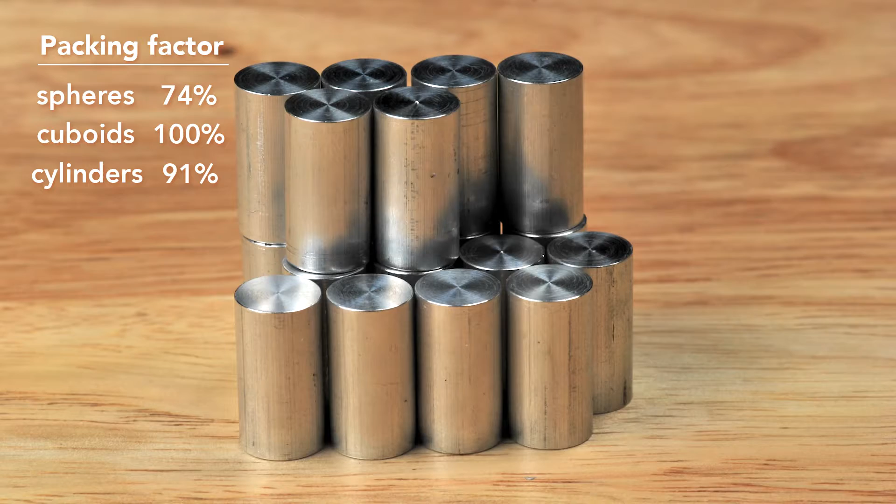From the top, it's like a sphere, and from the side, it's like a cuboid. A cylinder has a maximum packing factor of about 91%, not as good as the cuboid, but better than the sphere. Most important of all, the cylinder can be rapidly manufactured.

The can begins as this disc called a blank, punched from an aluminum sheet about 3/10 of a millimeter thick. The first step starts with a drawing die, on which sits the blank and then a blank holder that rests on top. We'll look at a slice of the die so we can see what's happening.

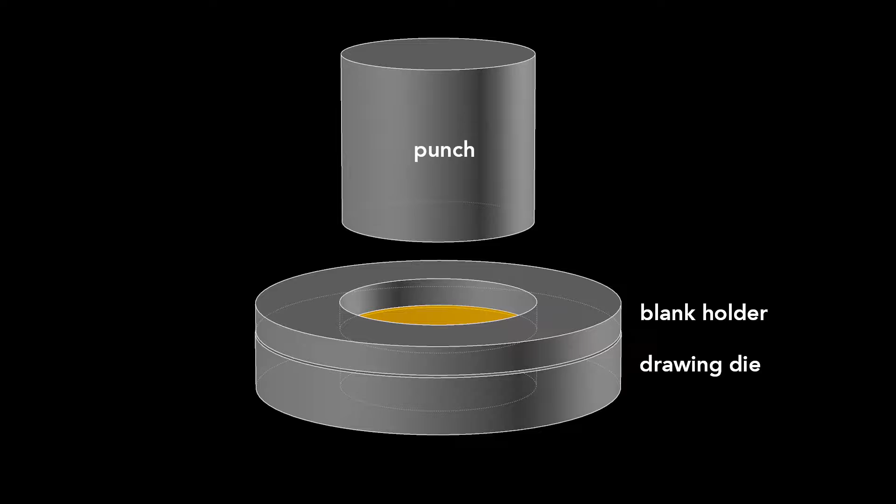A cylindrical punch presses down on the die, forming the blank into a cup. This process is called drawing. This cup is about 88 millimeters in diameter, larger than the final can, so it's redrawn.

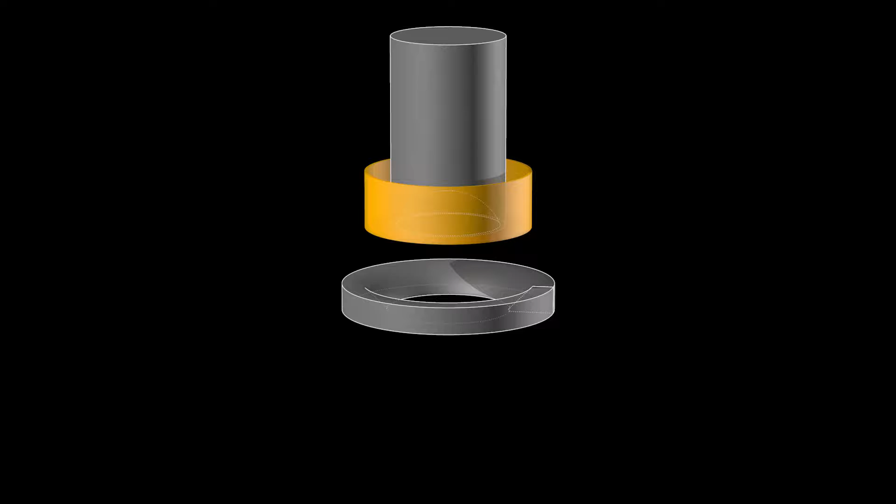That process starts with this wide cup and uses another cylindrical punch and a redrawing die. The punch presses the cup through the redrawing die and transforms it into a cup with a narrower diameter, which is a bit taller.

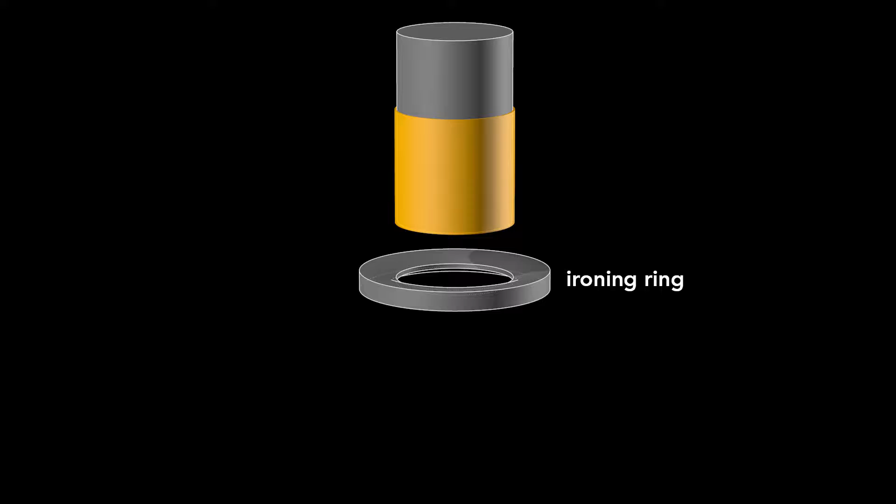This redrawn cup is now the final diameter of the can, 65 millimeters, but it's not yet tall enough. A punch pushes this redrawn cup through an ironing ring. The cup stays the same diameter as it becomes taller and the walls thinner.

If we watch this process again up close, you see the initial thick wall and then the thinner wall after it's ironed. Ironing occurs in 3 stages, each progressively making the walls thinner and the can taller.

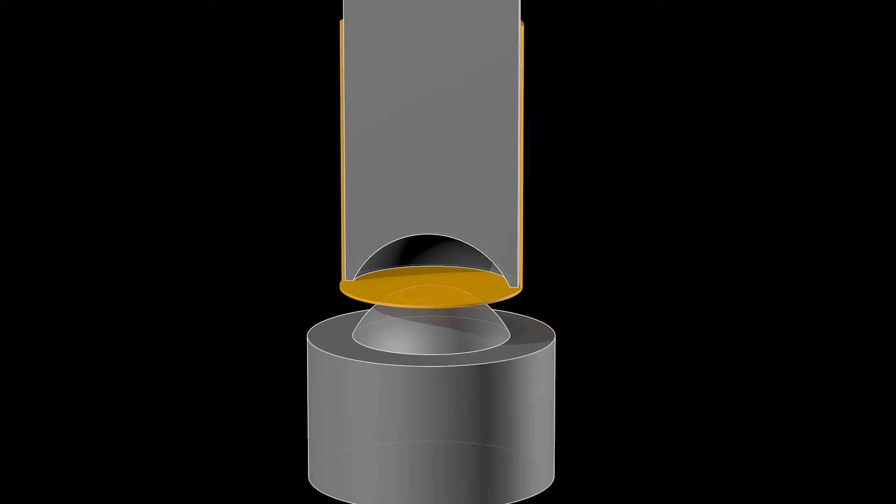After the cup is ironed, the dome on the bottom is formed. This requires a convex doming tool and a punch with a matching concave indentation. As the punch presses the cup downward into the doming tool, the cup bottom then deforms into a dome.

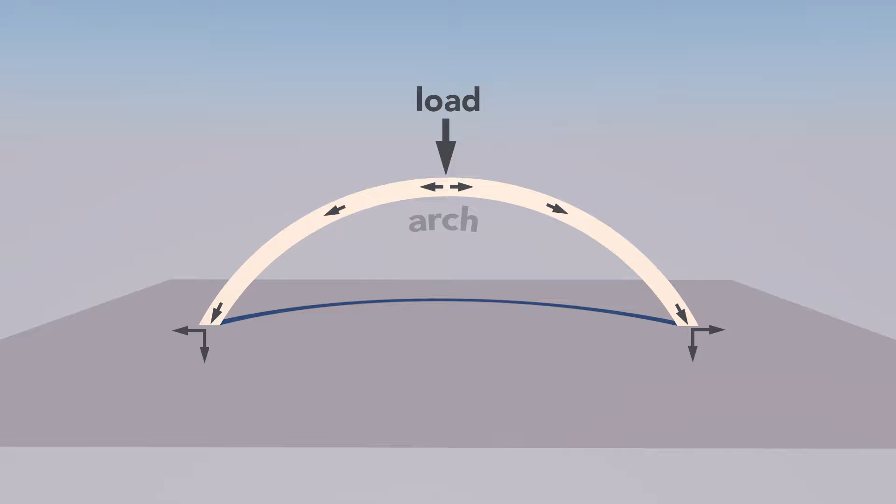That dome reduces the amount of metal needed to manufacture the can. The dome bottom uses less material than if the bottom were flat. A dome is an arch revolved around its center. The curvature of the arch distributes some of the vertical load into horizontal forces, allowing a dome to withstand greater pressure than a flat beam.

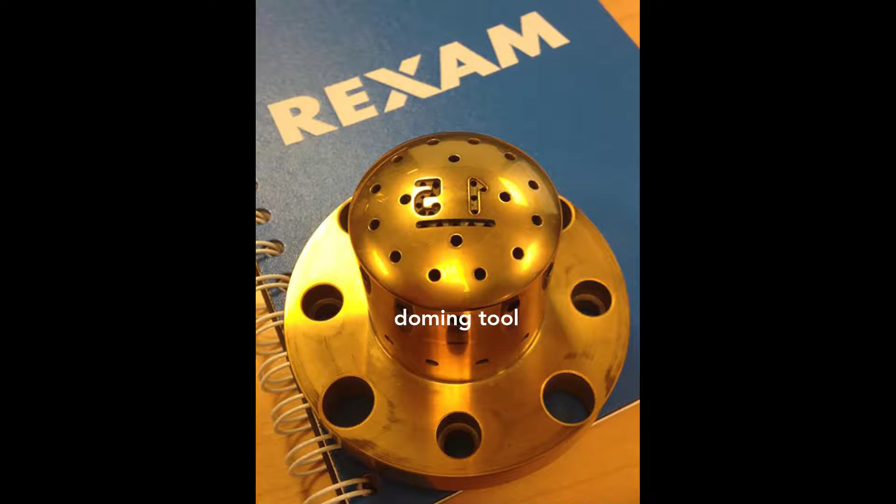On the dome, you might notice 2 large numbers. These debossed numbers are engraved on the doming tool. The first number signifies the production line in the factory, and the second number signifies the body maker number. The body maker is the machine that performs the redrawing, ironing, and doming processes. These numbers help troubleshoot production problems in the factory.

In that factory, the manufacturing of a can takes place at a tremendous rate.

These last 3 steps, redrawing, ironing, and doming, all happen in one continuous stroke in only 1/7 of a second. The punch moves at a maximum velocity of 11 meters per second and experiences a maximum acceleration of 45 Gs. This process runs continuously for 6 months, or around 100 million cycles, before the machine needs servicing.

Now, if you look closely at the top of the can body, you see that the edges are wavy and uneven. These irregularities occur during the forming. To get a nice, even edge, about 6 millimeters is trimmed off of the top. With an even top, the can can now be sealed.

But before that sealing occurs, a colorful design is printed on the outside. The term of art in the industry is decoration. The inside also gets a treatment. A spray-coated epoxy lacquer separates the can's contents from its aluminum walls. This prevents the drink from acquiring a metallic taste and also keeps acids in the beverage from dissolving the aluminum.

The next step forms the can's neck, the part of the can body that tapers inward. This necking requires 11 stages. The forming starts with a straight-walled can.

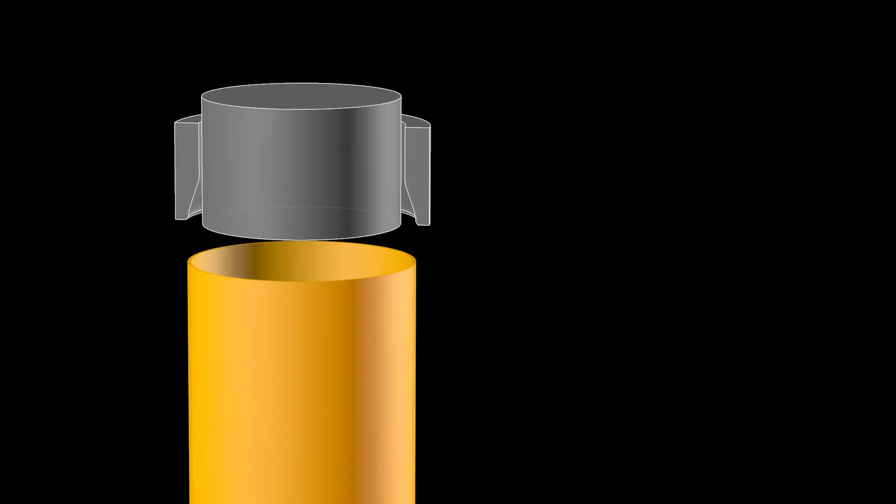The top is brought slightly inward, and then this is repeated further up the can wall until the final diameter is reached. The change in neck size at each stage is so subtle that you can barely tell a difference between one stage and the next. Each one of these stages works by inserting an inner die into the can body, then pushing an outer die, called the necking sleeve, around the outside.

The necking sleeve retracts, the inner die retracts, and the can moves to the next stage. The necking is drawn out over many different stages to prevent wrinkling or pleating of the thin aluminum.

Since the 1960s, the diameter of the can end has become smaller by 6 millimeters, from 60 millimeters to 54 millimeters today. This seems a tiny amount, but the aluminum can industry produces over 100 billion cans a year, so that 6 millimeter reduction saves at least 90 million kilograms of aluminum annually.

That amount would form a solid cube of aluminum 32 meters on a side. Compare that to a 787 Dreamliner with a 60-meter wingspan.

Now, after the neck has been formed, the top is flanged. That is, it flares out slightly and allows the end to be secured to the body, which brings us to the next brilliant design feature, the double seam.

On older steel cans, manufacturers welded or soldered on the ends. This often contaminated the can's contents. In contrast, today's cans use a hygienic double seam, which can also be made faster. This can is cut in half so you can see the cross-section of the double seam.

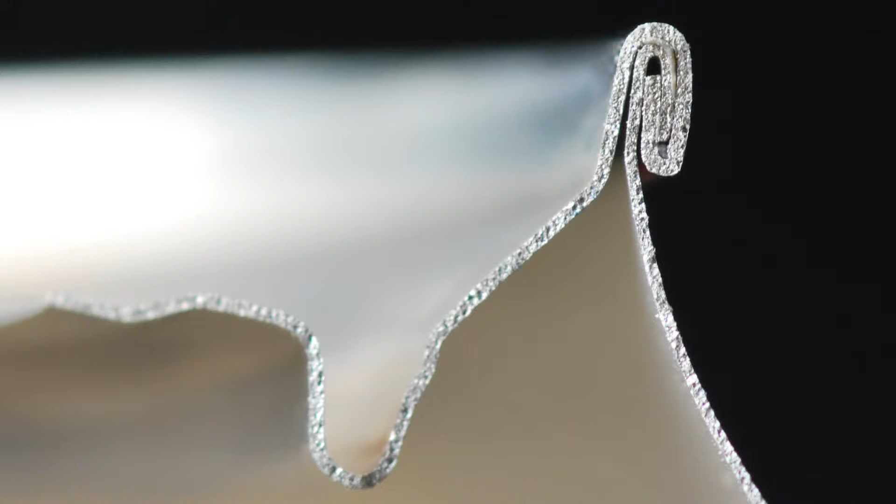To create this seam, a machine uses two basic operations. The first curls the end of the can cover around the flange of the can body. The second operation presses the folds of the metal together to form an airtight seal.

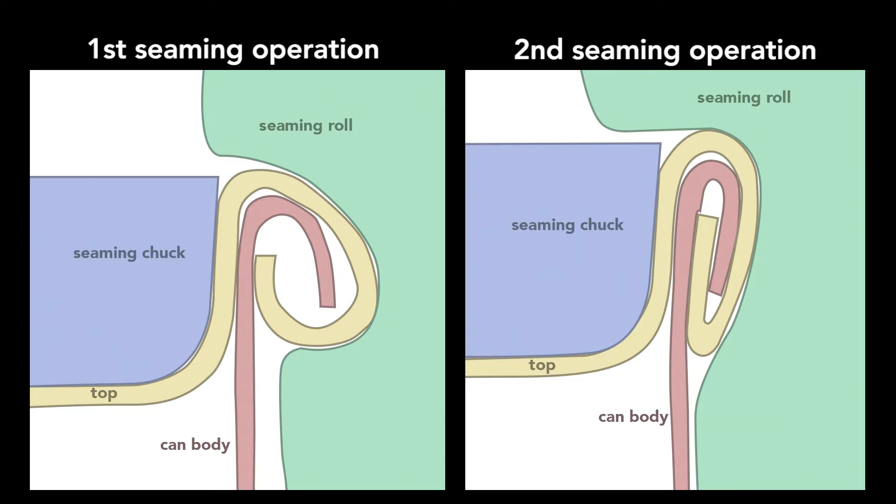While the operations themselves are simple, they require high precision. Parts misaligned by a small fraction of a millimeter cause the seam to fail. In addition to the clamping of the end and can body, a sealing compound ensures that no gas escapes through the double seam. The compound is applied as a liquid, then hardens to form a gasket.

The end, attached immediately after the can is filled, traps gases inside the can to create pressures of about 30 psi, or 2 times atmospheric pressure. In soda, carbon dioxide produces the pressure. In non-carbonated drinks like juices, nitrogen is added.

So why is a beverage can pressurized? Because the internal pressure creates a strong can despite its thin walls. Squeeze a closed, pressurized can, it barely gives. Then, squeeze an empty can. It flexes easily, the can walls are thin, only 75 microns thick, and they're flimsy. But the internal pressure of a sealed can pushes outwards equally and so keeps the wall in tension.

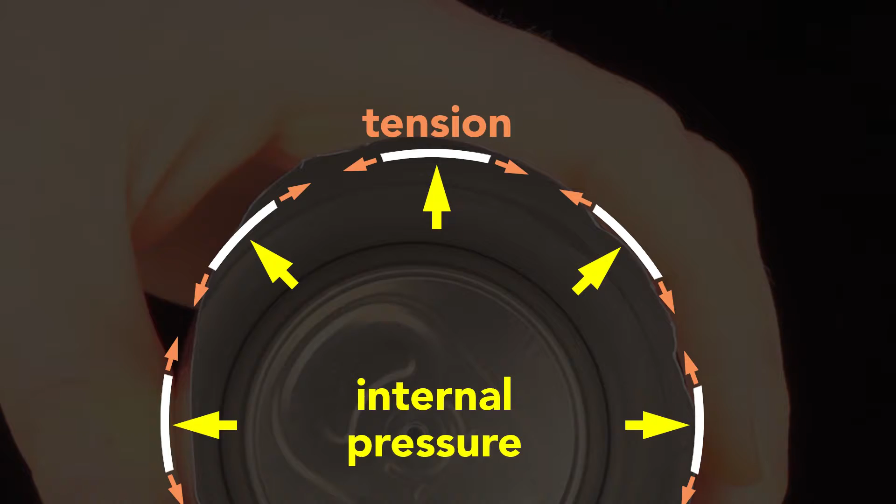This tension is key. The thin wall acts like a chain. In compression, it has no strength, but in tension, it's very strong. The internal pressure strengthens the cans so that they can be safely stacked. A pressurized can easily supports the weight of an average human adult.

It also adds enough strength so that the can doesn't need the corrugations like in this unpressurized steel food can. While initially pressurized to about 2 atmospheres, a can may experience up to 4 atmospheres of internal pressure in its lifetime due to elevated temperatures, and so the can is designed to withstand up to 6 atmospheres or 90 psi before the dome or the end will buckle.

Why is there a tab on the end of the can? It seems a silly question. How else would you open it? But originally, cans didn't have tabs. Very early steel cans were called flat tops for pretty obvious reasons. You use a special opener to puncture a hole to drink from and a hole to vent.

In the 1960s, the pull tab was invented so that no opener was needed. The tab worked like this: you lift up this ring to vent the can and pull the tab to create the opening. Easy enough, but now you've got this loose tab.

The cans ask you to please don't litter, but sadly these pull tabs got tossed on the ground where the sharp edges of the tabs cut the bare feet of beachgoers or they harmed wildlife. So the beverage can industry responded by inventing the modern stay-on tab.

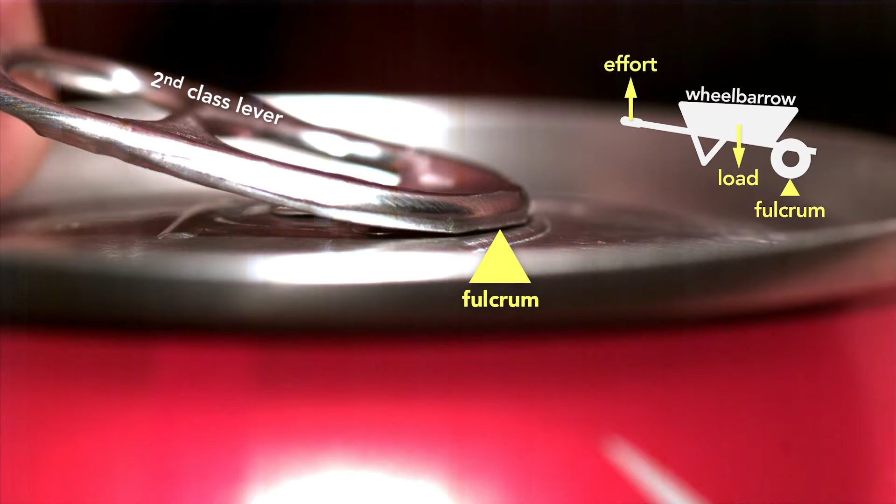This little tab involved clever engineering. The tab starts as a second-class lever. This is like a wheelbarrow because the tip of the tab is the fulcrum and the rivet the load. The effort is being applied on the end.

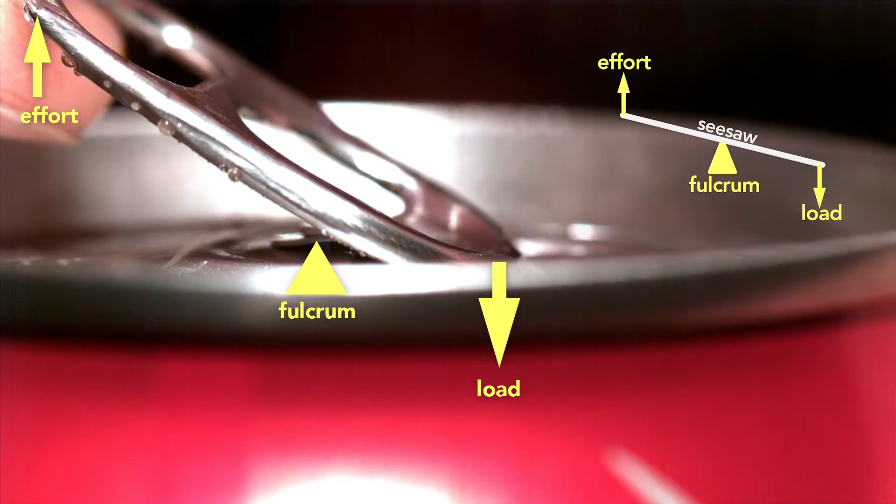But here's the genius part. The moment the can vents, the tab switches to a first-class lever, which is like a seesaw, where the load is now at the tip and the fulcrum is the rivet. You can see clearly how the tab, when working as a wheelbarrow, lifts the rivet.

Part of the reason this clever design works is because the pressure inside the can helps to force the rivet up, which in turn depresses the outer edge of the top until it vents the can, and then the tab changes to a seesaw lever.

Looking from the inside of the can, you can see how the tab first opens near the rivet. If you try to simply force the scored metal section into the can using the tab as a first-class lever with the rivet as the fulcrum throughout, you'd be fighting the pressure inside the can. The tab would be enormous and expensive.